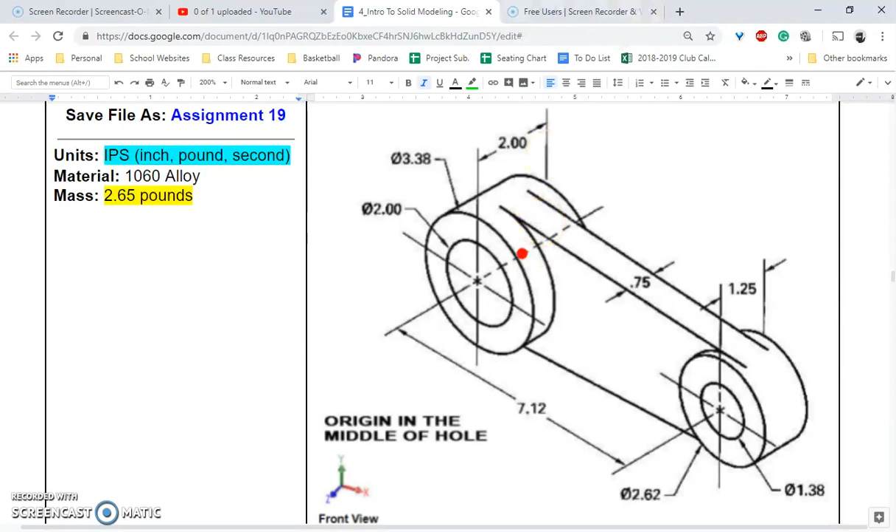Okay, so I'm going to pull this to my other screen, and in SolidWorks I'm going to open a new part, and I'll change my units to IPS if they aren't already, and we can go and get the sketch tool and we can sketch on the front plane. So you're going to have to do this in several different steps.

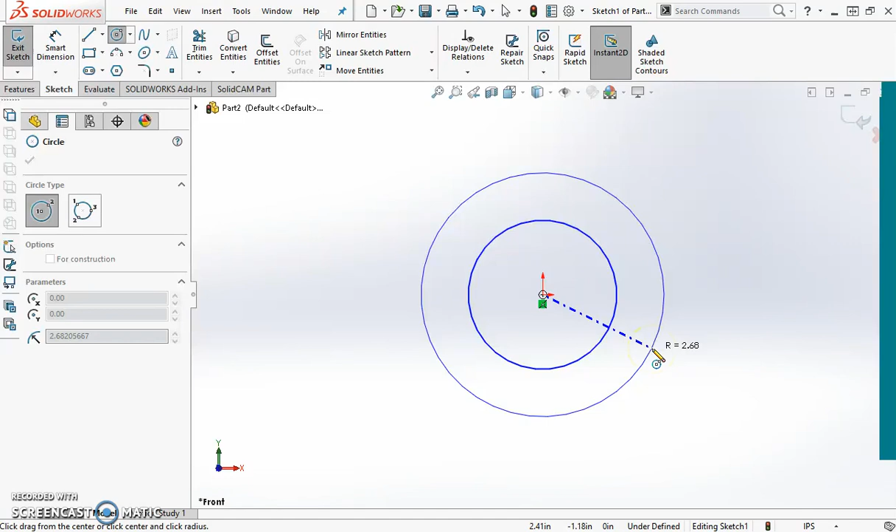First, I'm just going to be drawing a big circle here and another circle around this. And I'll zoom out and I'll draw another circle over here with a circle surrounding it. So that kind of indicates my two circles that you see on either side.

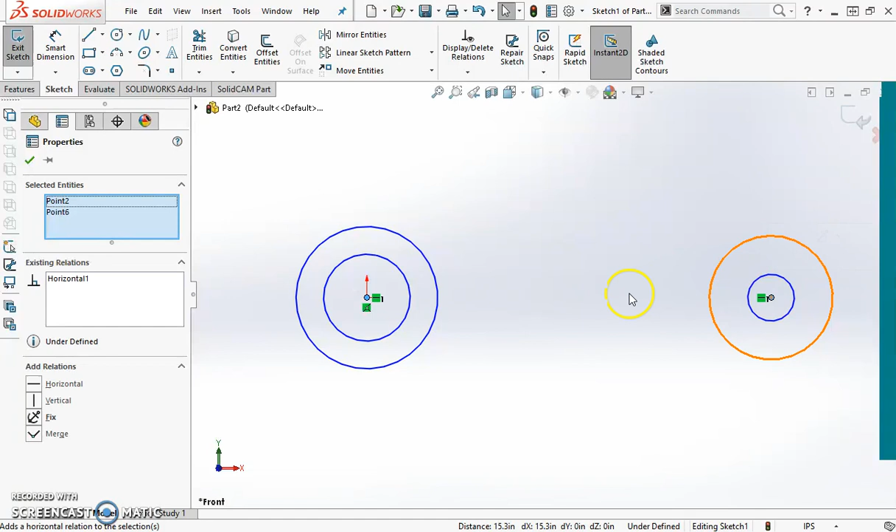And we can first set the center point of this one on the far right to be horizontal from the origin. So I click the origin, hold in shift, click the center point all the way over here, and I'm going to make that horizontal. Okay. And then I can go ahead and dimension different circles. So I'm going to start with the outside of this one, just so things don't resize.

And that is going to be 3.38. And then the inside circle is 2. The outside circle for this one over here is 2.62. And the inside is 1.38.

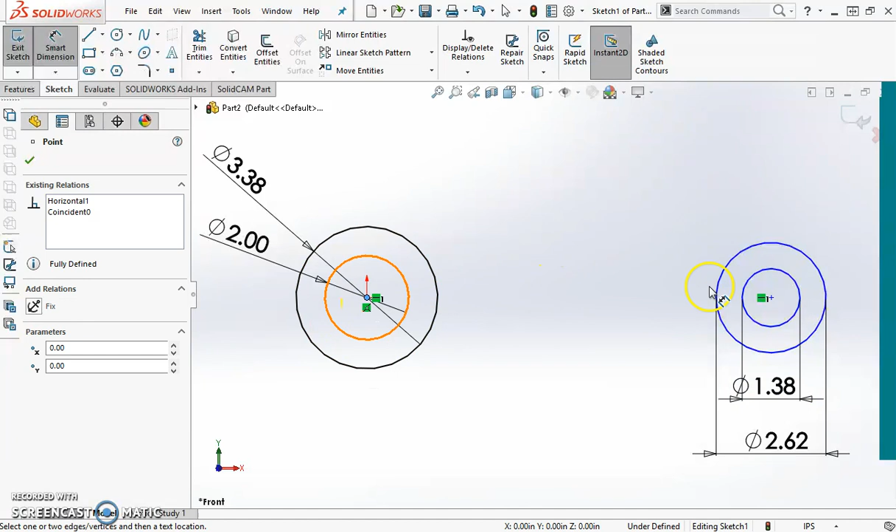Okay. Now it's still blue because it wants to know the distance away from the origin. So you can select your origin and the center point of this other circle, and that is a total distance of 7.12 away. I'm going to connect these different circles with the line tool, and if you move your mouse over the outside circle here, you will see that a yellow dot pops up. So that's going to be the very top of this.

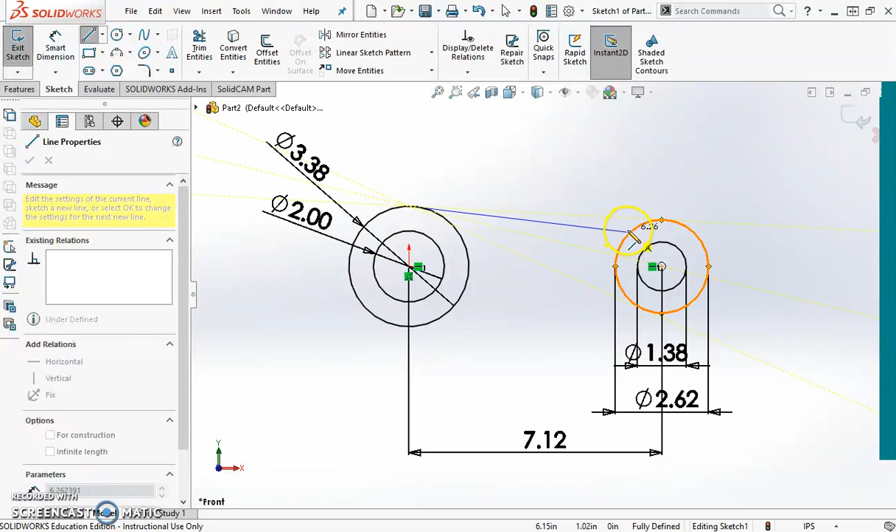So I'm going to select that, move my mouse over to this other outside circle. You notice if you just move your mouse onto it and you're patient, the yellow dot will also pop up. So you can select that. And I don't want to continue to draw, so I'll hit escape. I'm going to do the same process at the bottom.

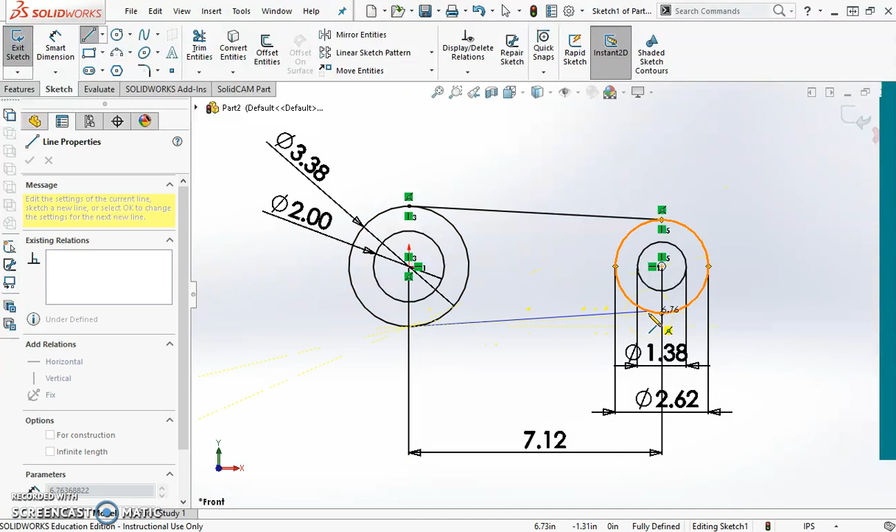Get your line tool, move your mouse over that circle, that yellow dot will pop up, and then move up to this circle, move your mouse over the outside, and the yellow dot will pop up. So then I can hit escape on my keyboard, and you notice that's fully defined.

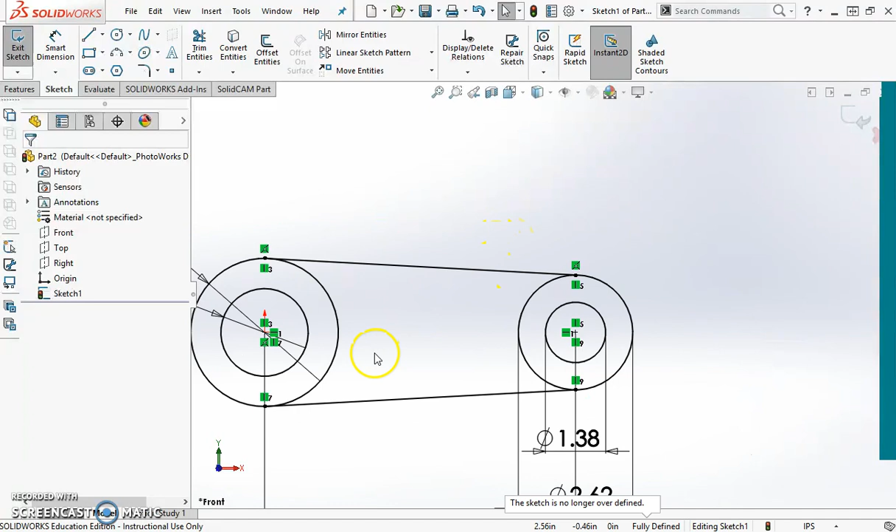And a lot of you will be saying, well, shouldn't this be tangent? With it being connected to the top here, it is actually tangent. So you don't necessarily need to have that relation there. So this is fully defined. So we can move ahead and go into the extrusion portion of this.

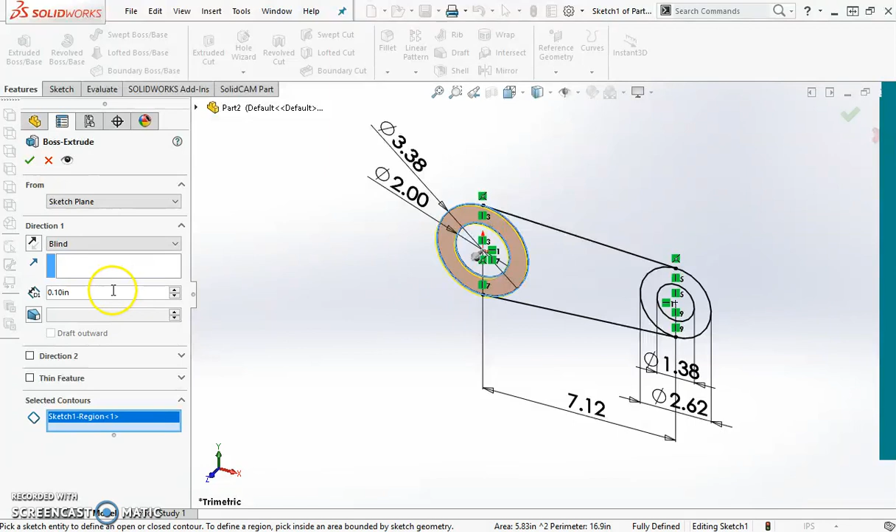So switch your tab to features and hit extrude. And we're going to be doing this in 3 different steps. So first I'm going to move my mouse over this region, just this kind of donut shape. Select in there. And it shows in your picture that this has a total distance of 2, but keep in mind that we want to keep the origin right in the middle.

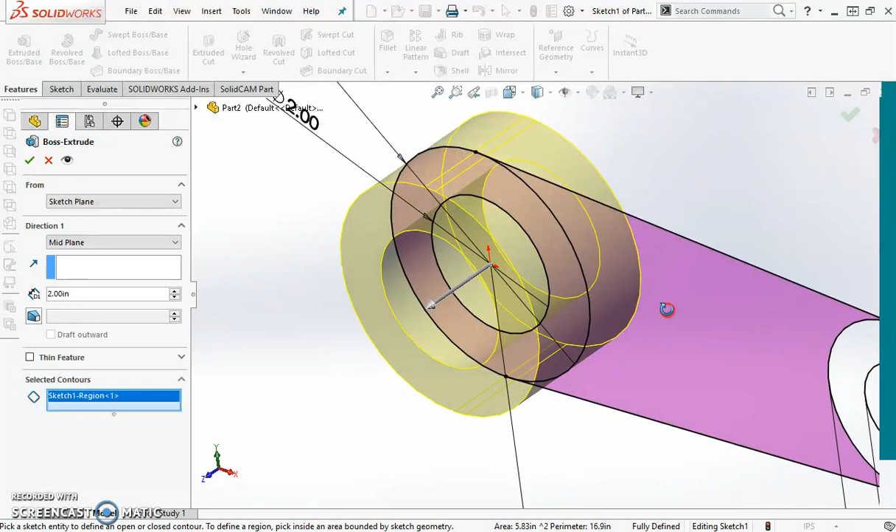So instead of just extruding forward, we actually want to change this from blind to midplane. So that way, when we extrude, you can see the origin is going to be stuck right in the middle. That's the trick to this one. So I'll hit the green check. Then I'll go back and hit extrude again.

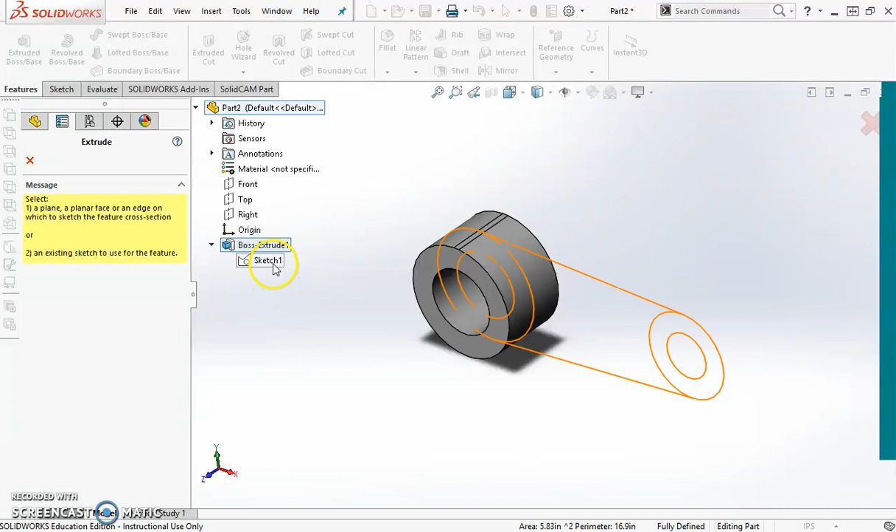It's going to give me this warning asking me for an existing sketch. Well, since I already did the sketch, it is hidden by hitting this drop down, and it's hidden underneath all of this. So I can select that sketch 1 again. And going right back across here, I'll select the middle part now. And we want to change this to 0.75. And once again, it wants to be a midplane, so go from blind to midplane, and the green check.

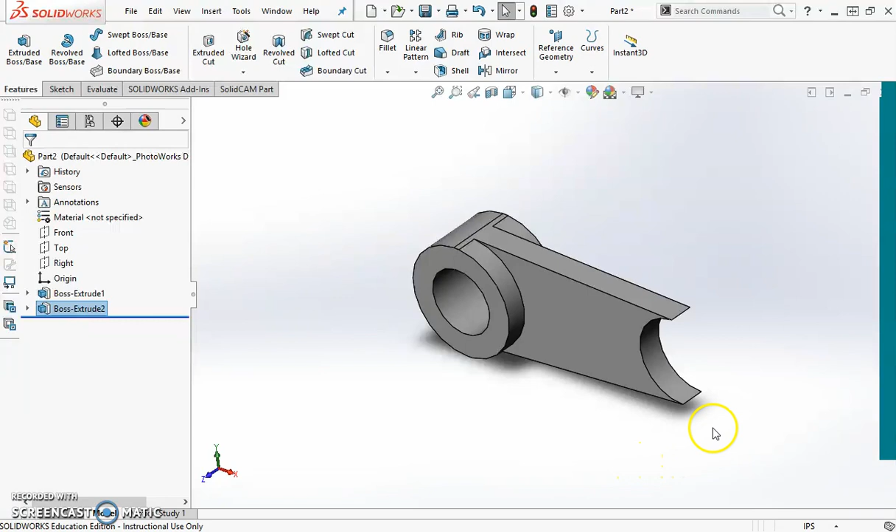Okay. And then the last one is the other circle. So hit extrude, select your sketch again, select this donut shape, and the total measurement there is 1.25, and we want this to be midplane as well. Green check. So there's our complete shape.

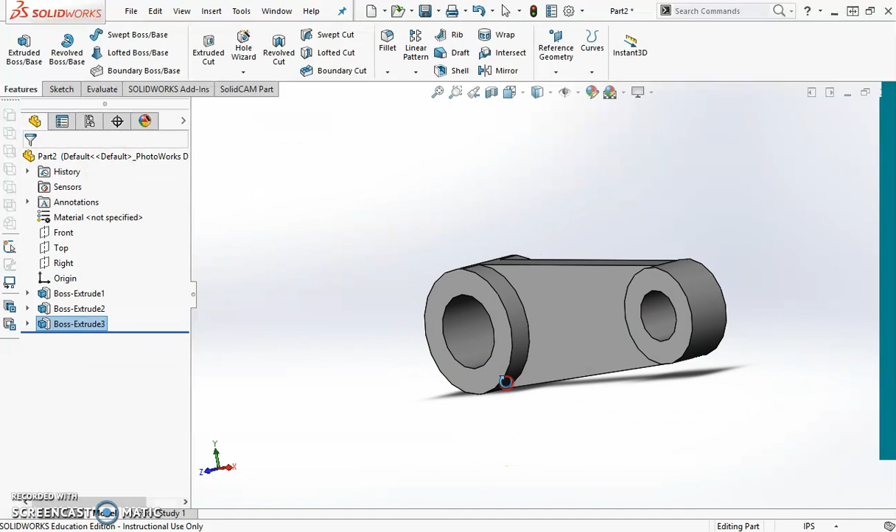Now we need to change the material, and this is 1060 alloy, which is a default. And then you can go and evaluate it. So evaluate mass properties, and we should get 2.65 pounds.

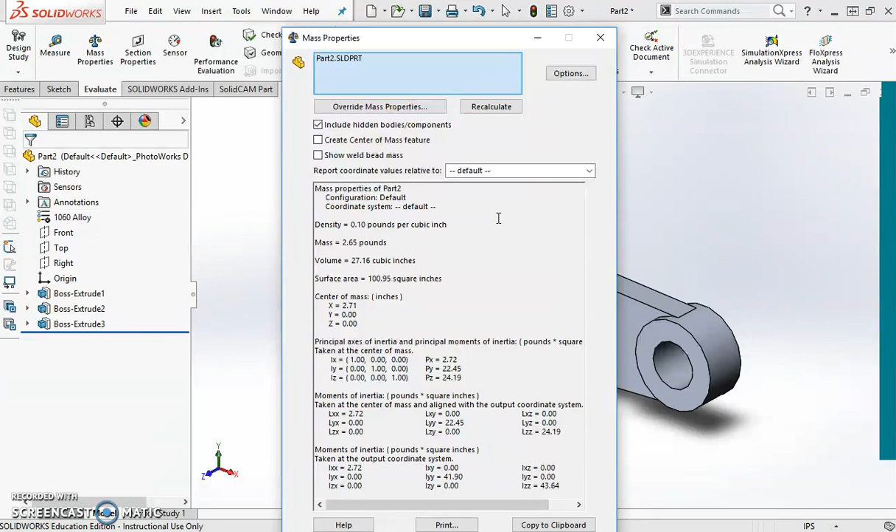2.65 pounds. If you got that, you can save this as the assignment name, and you can move on to the next assignment. If you didn't, you want to go back in and edit your sketch or one of your extrusions and figure out where the problem is. Fix that thing until this is correct.